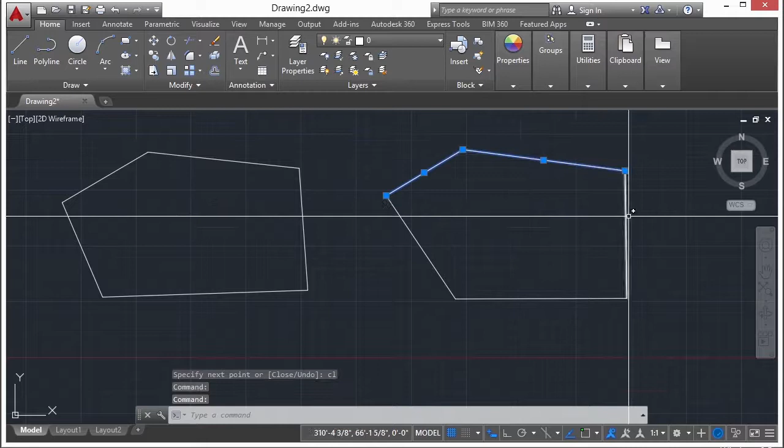You can go up to the Home tab on the ribbon and go to the polyline command, found in the Draw panel. You draw it just like you would any other line, but when you select it, it's one object. Now a line, if I were to draw a similar shape, looks about the same, but each one of these segments is its own object. That's the main difference, and that's really cool because you can do a lot with a polyline, but a line gives you more control of the individual segments. It just depends on what you need to draw.

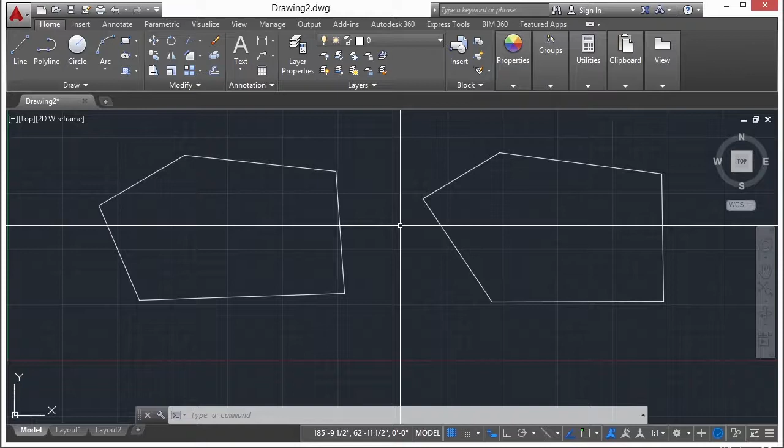You can draw a polyline, or pline as they're often called, by entering the pline command, P-L-I-N-E. You can draw them using coordinates, relative coordinates, polar coordinates, length, etc., just like with the line command. One difference is that plines can also be drawn as arcs, and you can switch between a line and an arc while drawing a polyline. Let me show you: start the polyline command by typing pline on the command line, or use the shortcut key PL.

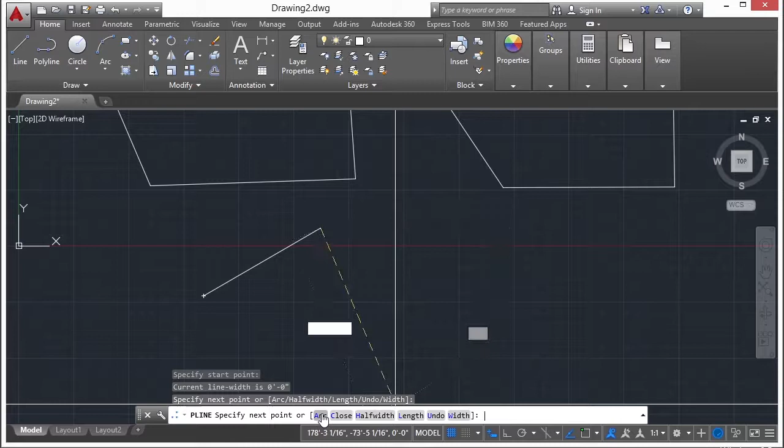Pick your first point, and then your second point - there's your line. Remember there are always options for a lot of commands. If I click on the arc option, I'm now drawing an arc, and it just continues on. These arcs, if drawn in sequence, will be continuous or tangent - they'll be tangent to the first arc that was drawn.

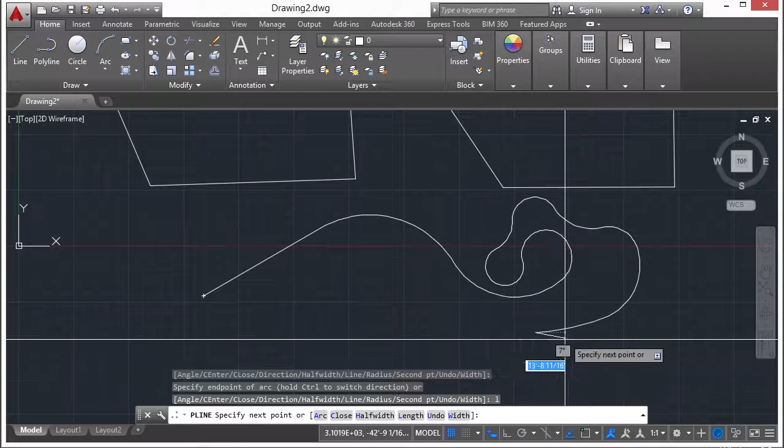If you want to draw a line, you just type in L or pick the line option on the command line, and it starts off drawing as a line, not an arc. That line will not be tangent to your previous arc. You can always switch - type A, type L again, and then press Enter to end your command.

After you draw a polyline, you can use the polyline edit or pedit command, P-E-D-I-T. Press enter, select your polyline, and you have a lot of different options you can choose from to make changes to your polyline.

You can close a polyline into a polygon with the close option. See, it found the open segment in our shape and filled in the blanks, going from point to point with a straight line. Of course, you can always undo something you just did.

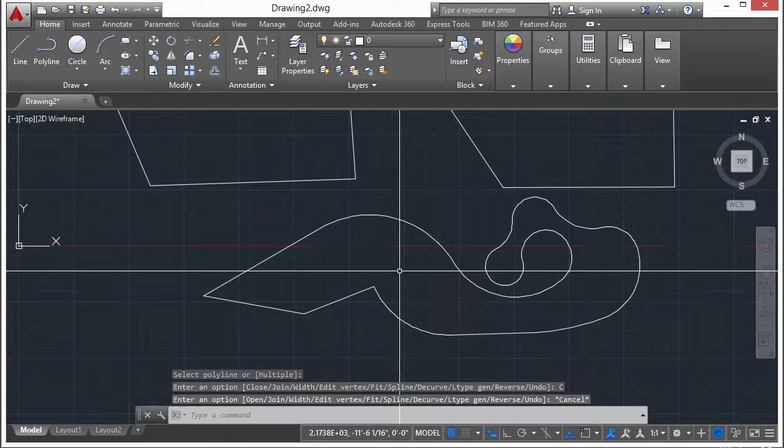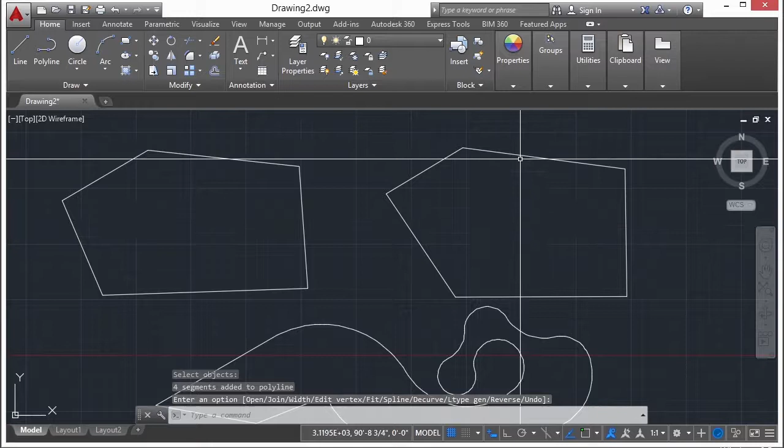If you have multiple lines, arcs, or polylines, you can use the join option. Up here we have all of these individual lines - I can convert them to polylines and join them all together to be one shape, similar to this first object. I'll type in the pedit command, select an object, and because it's not a polyline, AutoCAD asks if I want to convert it into a polyline. I'll type Y for yes, then click the join option and pick all the lines or objects I want to join together. Press enter again, and now all of those individual lines have been joined together to form one polyline.

You can do that with any type of line object, polyline, or arc. You can also edit a polyline's vertex just by grip editing it. If I select a polyline, I have endpoints, which look like little squares, or midpoints, which look like rectangles. If I hover over them, I get some options.

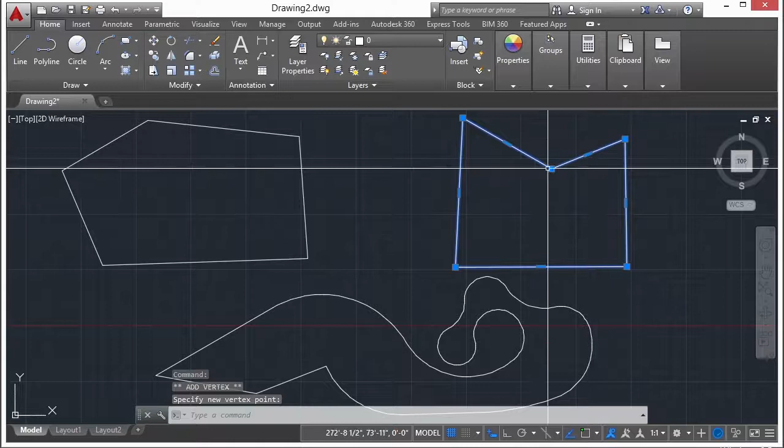I have the stretch vertex option, add vertex, or remove vertex. The add and remove are actually quite simple - if I select remove, it gets rid of it. If I come back up to this top one and go to add vertex, it allows me to add another vertex, sort of breaking that line and creating a vertex point. If I click the stretch option, it allows me to move it wherever I want.

So that's an endpoint. If I go to a midpoint, I essentially have the same options - I can stretch it, which allows me to move it, and wherever it's connected to will move relatively with it. I can add a vertex, or I can convert to arc, which changes it to an arc, and I just define the radius by moving my mouse. Now the arc's midpoint is exactly the same, except it allows me to convert it back to a line.

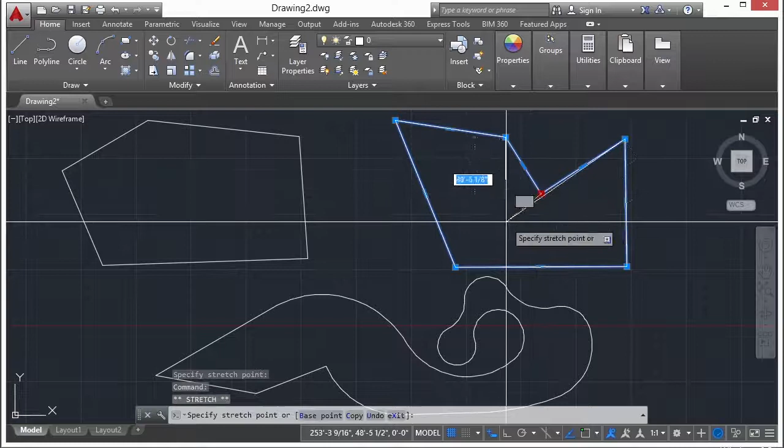If I pick that midpoint, it's a move. If I just pick the vertex, it's a move or stretch. But if I hover over it and click add vertex, I can do that at any time - it's the same regardless of what type of polyline it is. You can add a vertex right to this center arc, and it creates two different arcs, which is kind of cool - you can get some very interesting shapes created very quickly.

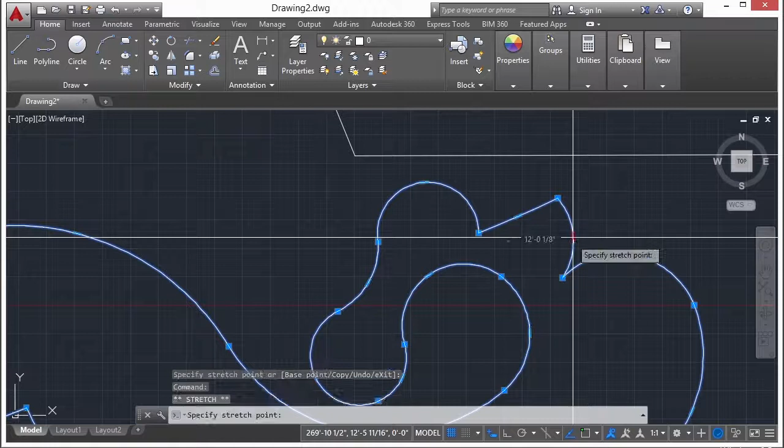I can quickly stretch, change, and edit these shapes and make some fantastic designs. Polylines are created the same way lines are created, so you can go back to that section to see how you'd draw a line, but it has a lot more options, a little more versatility, and it creates closed objects which you can use to find things like the area of that shape, etc.